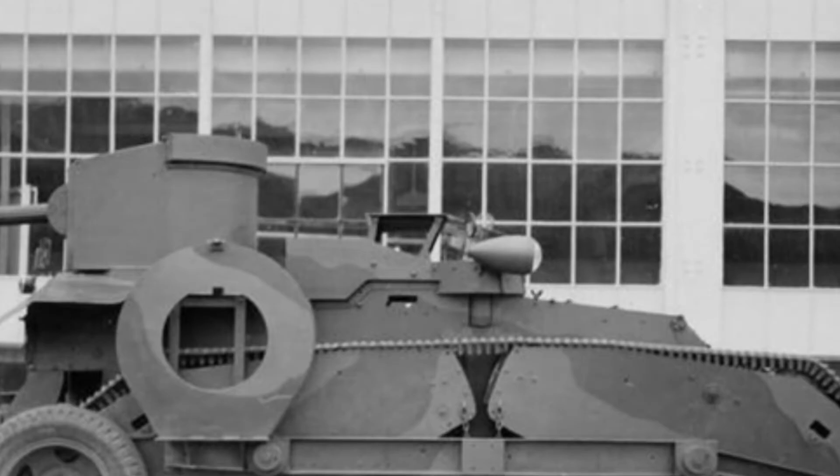In 1940, faced with an increasingly complex situation, New Zealand proposed a series of weapons development plans due to the lack of sufficient military strength at the time, attempting to create its own armored weapons, one of which was the Schofield tank. New Zealand itself had no experience in tank development. In fact, the Schofield tank was designed by the American General Motors. Although it was designed during World War II, it still had the style of the 1930s.

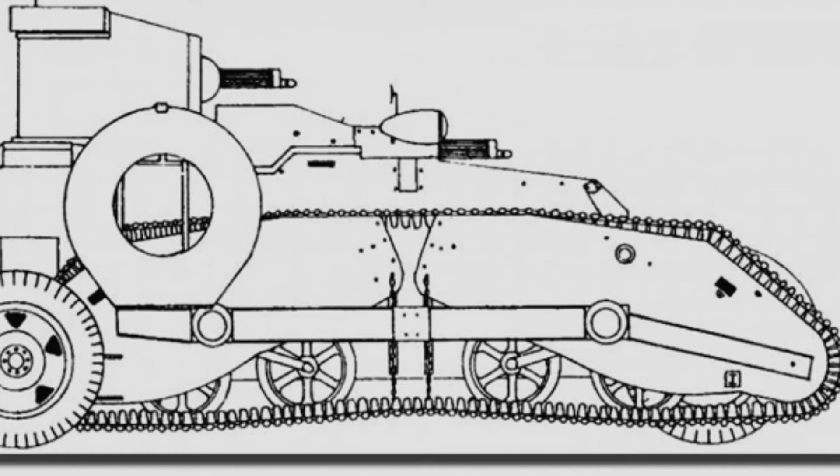Considering that tanks needed to be produced in New Zealand and the country did not have sufficient industrial capacity, the designers tried to use some commercial designs as much as possible. The tank chassis was modified from a truck chassis, and the weapon system was of the British Vickers series. The designers believed that this approach would allow New Zealand to complete production preparations in the shortest time possible.

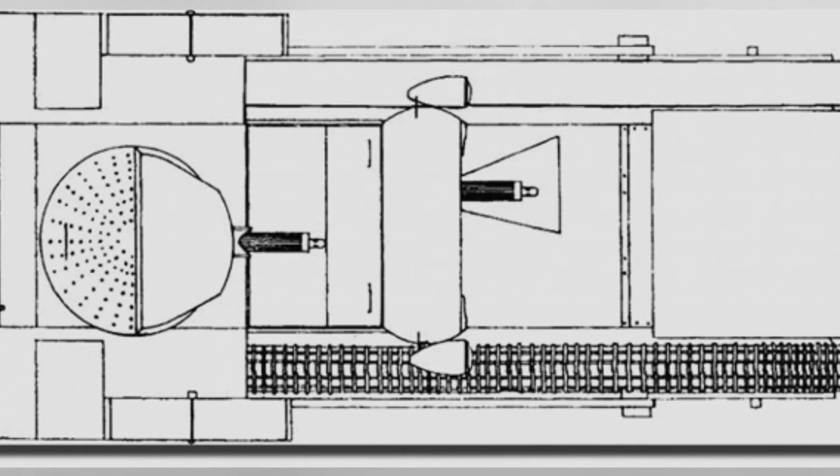The running gear consisted of tracks and 4 rubber wheels, with the tracks having a trapezoidal structure and a longer track length. The 4 small-diameter road wheels used British Horstmann suspension. Perhaps because the chassis was based on a truck chassis, an additional beam structure was added on both sides to connect the road wheels and idlers.

The wheeled running structure was quite unique, with the rear wheels serving as drive wheels mounted on the outside of the tracks, and the front wheels serving as steering wheels mounted on the inside of the tracks with a narrow wheelbase. They could switch modes by adjusting the wheels up and down, with the front wheels retracting and storing in a semicircular space at the front, while the rear wheels turned forward and retracted into a protective box above the front.

When using the wheeled structure to travel, the midsection of the tracks needed to be suspended 10 centimeters off the ground with ropes to prevent the tracks from dragging on the ground. Because this wheeled structure had no resilient suspension and was almost rigidly connected, it could increase highway travel speed but would cause a lot of shaking.

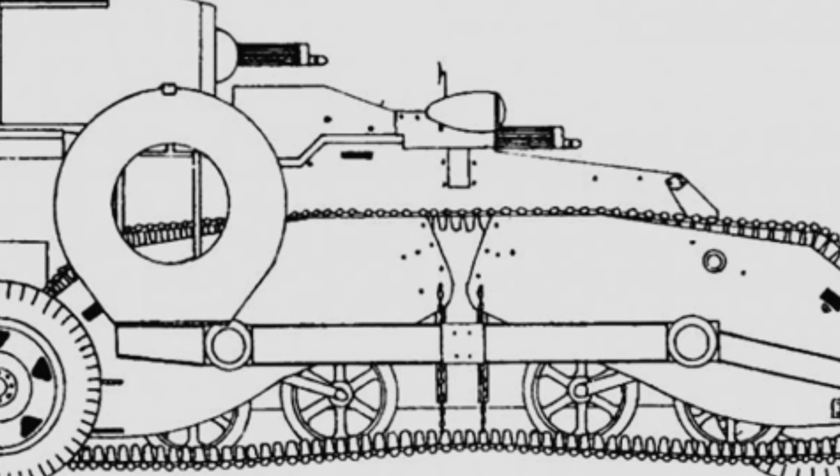The tank's armor was very thin, only able to withstand light weapons fire. However, the designers provided comprehensive protection, with even the rear storage boxes having basic protective capabilities. The tank's weaponry was weak, initially only having 2 Vickers .303 machine guns, one mounted in a spherical machine gun seat to the left of the driver, and one mounted in a small rotating turret at the rear. There were many racks inside the tank to store machine gun bullets.

The tank used a 3-person crew with a driver, co-driver, and vehicle commander. The driver was responsible for the main driving work, and the armored structure above his head could be raised to provide a wider field of view, but raising it would affect the turret rotation. The co-driver sat next to the driver and also operated the front machine gun. The vehicle commander stayed in the turret alone.

After training, the crew needed nearly 10 minutes to switch the tank from tracked to wheeled mode, while switching from wheeled to tracked mode took about 7 minutes. During this conversion process, the crew members needed to operate outside the vehicle, so this operating method was not suitable for execution on the battlefield.

In actual testing, people found that this tank was not very practical. For example, the engine was installed in a poorly ventilated compartment, making it prone to overheating and failure. The vehicle's turning performance was not very good, and it was prone to tipping over when making sharp turns in wheeled mode. The configuration of 2 machine guns was too weak, and at a minimum, a small caliber cannon needed to be installed.